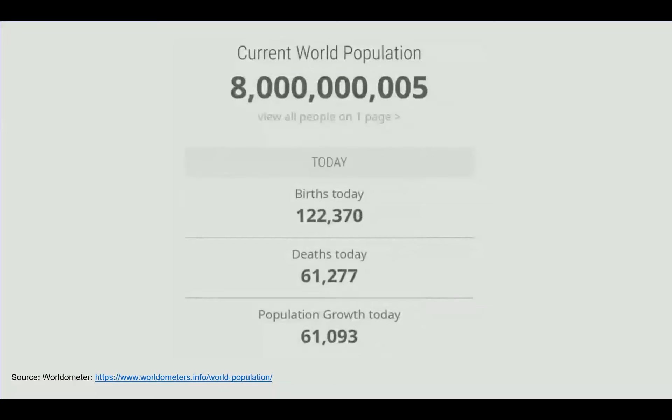Every day, 193,107 people are added to the world's urban populations. That's 1.4 million people per week, or basically the population of Sydney every month is added to the world's cities. How do we accommodate these people in a sustainable way?

And as I say, I think we have an ethical obligation to do so. The verb to build is an intrinsically socially good thing. 1.6 billion people around the world live in inadequate conditions. This is a photo I took from Mumbai, I think about 15 years ago, of the Dharavi area. So according to the United Nations, 1.6 billion people live in inadequate global conditions, inadequate housing, and 1 billion people live in slums. And I think the construction industry, the architecture industry, the built environment industry has an obligation to build, to provide healthy, safe and sustainable housing for everybody.

And building is a societal good. There's few things I can think of that provide a better societal good than to provide these kind of houses and hospitals and schools and more.

But at the same time, we have to accept as an industry that to build is often an intrinsic environmental bad. What I mean by that is every square meter we build has a carbon footprint, and that carbon footprint can be quite high. The materials we rely on in our industries have significant and often very negative impacts on the environment. So if we look at, on the left-hand side here, you've got a pie chart.

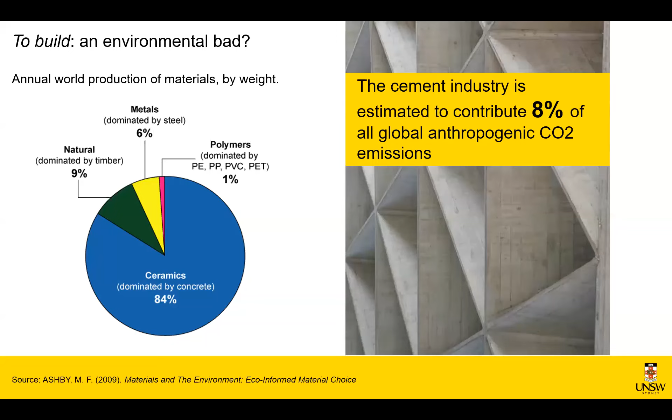This I find an amazing statistic - we are truly in the Anthropocene. As a human race, we have now dominated nature. If we weigh all of our buildings and infrastructure, they now weigh more than all trees and shrubs. That's an amazing statistic. All human-made stuff now weighs more than the biosphere, all natural-made stuff.

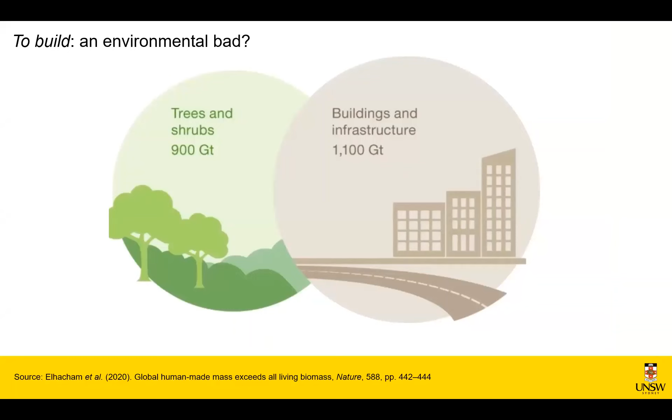That's quite incredible. There's another graphic I quite like which encapsulates this - a visualization of anthropogenic mass. What you're going to see on the right-hand side is all human-made stuff, and at the top it's concrete. Everything grey is concrete. On the left-hand side is all natural-made stuff, global biomass, the dry weight of all life on Earth. I'll put a little animation, hopefully this works.

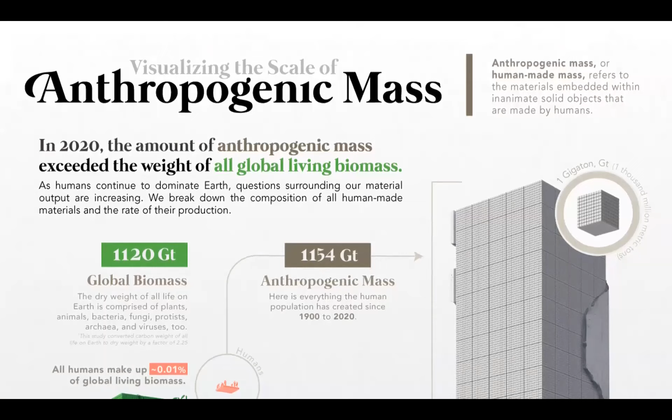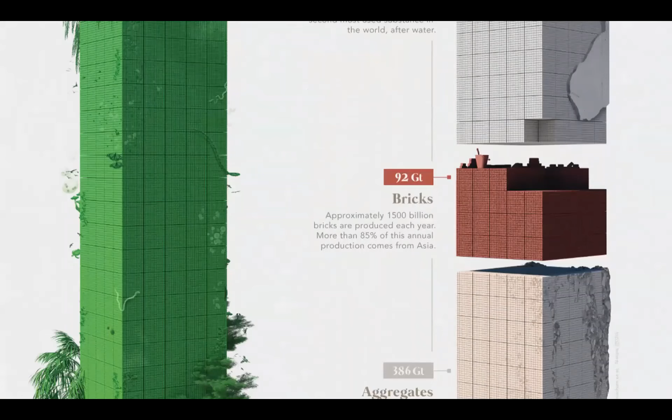So what you're seeing on the right-hand side, that's concrete. Each square of that is a gigaton. And then you've got bricks, and then aggregates, and then metals, and then asphalt - built environment materials. We use trillions and trillions of tons of these kinds of things, and they now dominate what the world is and what the world is made out of. All plastic, for example, now has double the total weight of the entire animal kingdom.

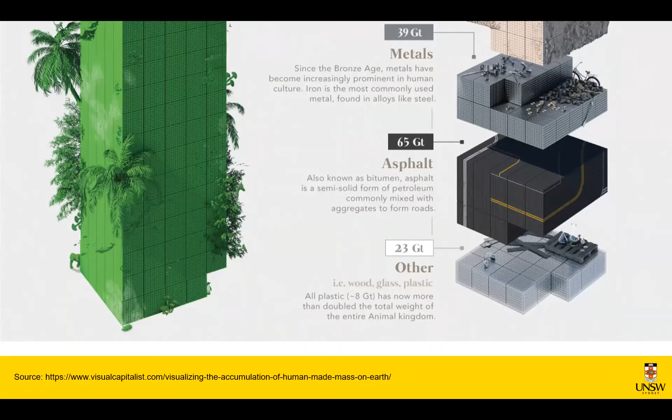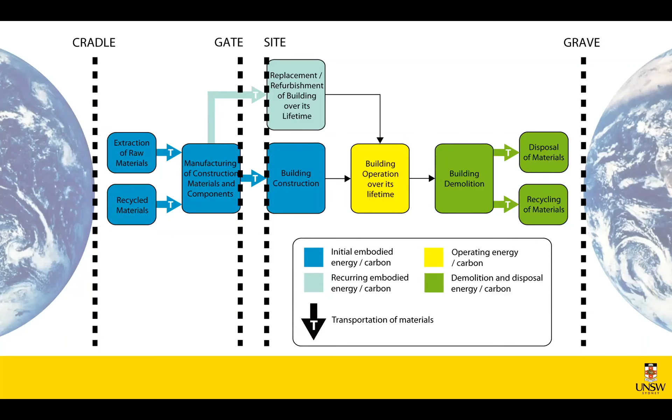At each point in this diagram, carbon emissions are released. As an industry, we're guilty historically of focusing in just on one part of that, just on the operational part. So what I really want to do today is open up that diagram and try to understand what some of the other areas are, how significant they are, and how we can reduce them. So what is embodied carbon?

Well, embodied carbon is the greenhouse gas emissions due to constructing the building and its materials - the greenhouse gas emissions from extracting the raw materials, processing those materials, assembling the components, transporting those materials around, effectively to make the building, and then to maintain the building, and also often to deconstruct and dispose of the building at the end of its life, although that's sometimes not included due to the uncertainty around measuring that in the future.

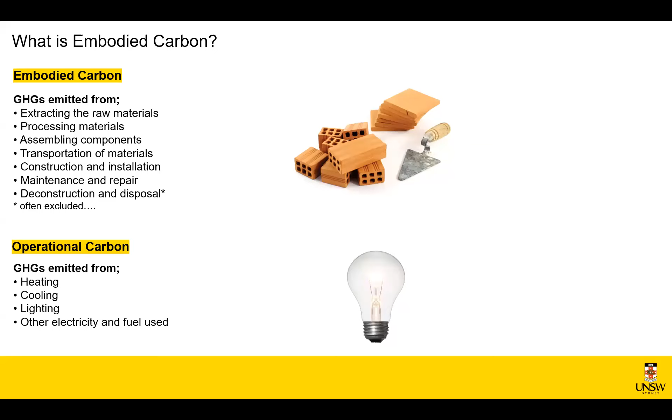And we've got the operational carbon - that's the heating, the cooling, the lighting, and the small loads, plugging in your iPhones and your laptops as well. And if we want to properly understand what impact a building has on the environment, we need to add the two of them together - the operational plus the embodied - and we get the life cycle carbon emissions.

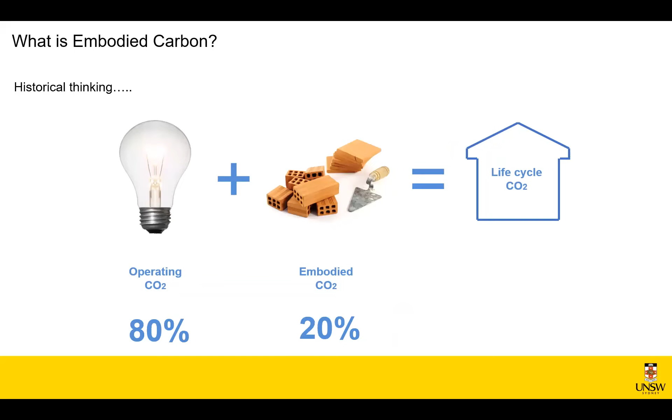It's relatively straightforward. And historically, you go back 20 years, when I was starting my PhD, the historical thinking was, look, our operating emissions are about 80%. Embodied carbon is important, but really it's about 20%. And you can see that in our building regulations, for example.

We have relatively mature building regulations around the world that are concerned with operating emissions. We have very few building regulations concerned with embodied emissions. However, our current thinking now is it's probably closer to 50-50. Now, why is that? Why has our thinking changed?

Well, our building regulations have got stricter, they've got tighter, we've got more energy efficient. To heat, cool and light that square meter of floor space, we use less energy now than we did, say, 20 years ago. Better facades, more efficient systems. To do that, often we use more materials. We might have more insulation in the building. We might have solar panels stuck to the building.

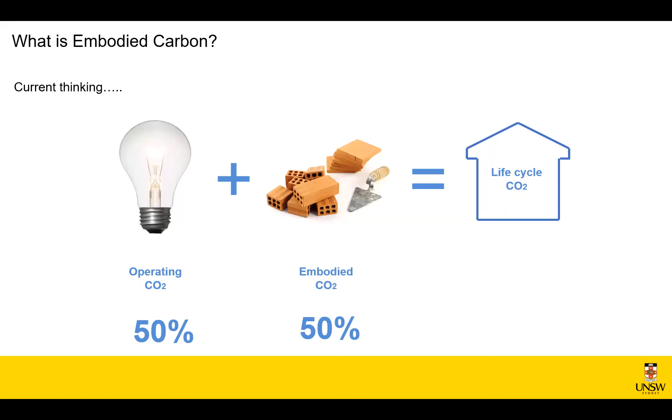We've also got better at measuring embodied carbon. We've got better at measuring some of the things that were not measured in the past, the mechanical systems, the facades, the finishes. So really, we're probably at 50-50. But the truly perhaps frightening thing, or thing to be very much aware of, is by 2030, we might be at 0% operating and 100% embodied.

So if we are to meet the World Green Building Council's targets, every new building built in 2030 onwards should be net zero or nearly zero operating emissions. So effectively it will have pretty much close to zero operating carbon. And what that will mean is our embodied carbon effectively becomes the total carbon footprint of a building. And that's a pretty big shift.

And if I look at an architecture student joining the program in my school next year, they will spend 3 years in their undergraduate. They might go out and work for a year, then they'll come back and do 2 more years in their masters, then they'll work a bit more. By the time they become an accredited architect, it will be 2030.

They'll be moving into an industry where the understanding of what our carbon emissions are will have totally transformed in 10 to 15 years. And they require a totally different way of understanding, measuring and changing the carbon footprint of our buildings. So this is all happening very, very quickly.

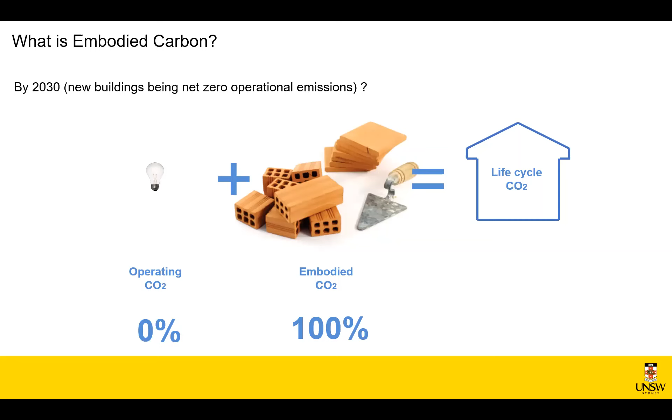Here's a good example, which I've calculated. If this year, 2020, we build a brand new NABERS 5.5-star office building in Sydney, we build it in 2022, and we're going to measure all its carbon emissions all the way to 2072. That's what you can see here.

And what we can see in 2022, we build the building, and that has a big upfront embodied carbon. You've got to make the concrete, the steel, the triple glazing, all the solar panels on there, whatever. I'm estimating that would be about 1,800 kilograms of CO2 per square meter. And then day one, the building opens, you turn the lights on, you turn the air conditioning on, and then you've got the red line.

And over time, the red line builds up and accumulates. That's the operating emissions. That's the heating, the cooling, and the lighting. But what you can see is that red line is not linear. That red line is curving. And the reason that red line is curving is because over time we're decarbonizing our grids as well, which is a good thing.

But it does mean that when we consider the whole life cycle footprint of a new building built in 2022, what we can see in the pie chart on the right-hand side is the embodied emissions make up the majority of the building's carbon footprint. In this case, about 2/3. Now, this is a low energy building and a high embodied carbon building. So sometimes it might be 50-50.

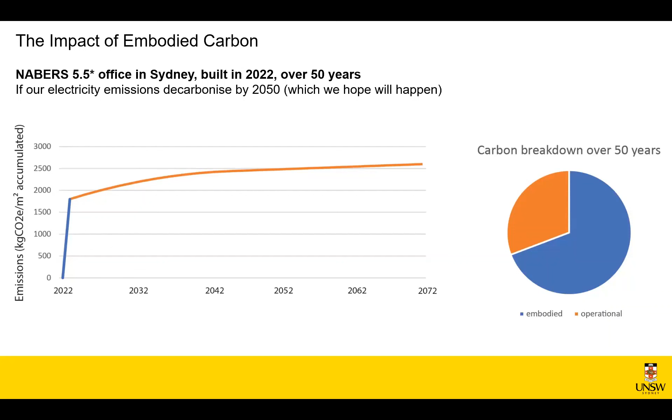So against this backdrop as well, as I mentioned before, we're building more than ever before globally. Current projections on future growth of buildings are effectively that we're building the equivalent of every building in Japan every year. So if you take the entire floor area of Japan, all the building stock, we're building that every year. 2022, we're building Japan. 2023, we're building Japan. 2024, we're building Japan.

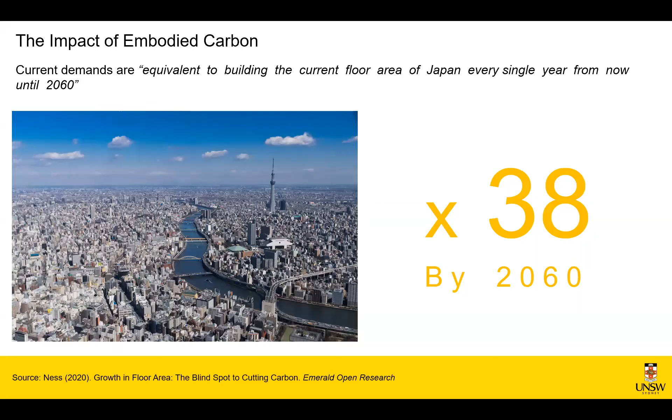So we are set to build all the buildings in Japan every year for the next 38 years. What's the carbon impact of that? How many thousands and millions of tons of CO2 emissions could that be? And how will that impact our aim to limit global heating to below 1.5 degrees? It's relatively easy to do the math around this.

If you want an 83% chance, it's 300 gigatons. You want a 17% chance, it's 900 gigatons. So it depends on what chance you want. Let's just say a 50% chance. So we've got a remaining carbon budget of 500 gigatons, and we're going to build 230 billion square meters of floor area globally. So let's assume we build all that floor area to the standard Australian detached house. And the standard Australian detached house, I know, is about 660 kilograms of embodied carbon, kilograms of CO2 per square meter.

So we've got a very simple piece of math. We can take 230 billion square meters, we multiply that by 660 kilograms of CO2 equivalent, and the embodied carbon of all those new buildings will be 151.8 gigatons of CO2. That's 30% of our remaining carbon budget.

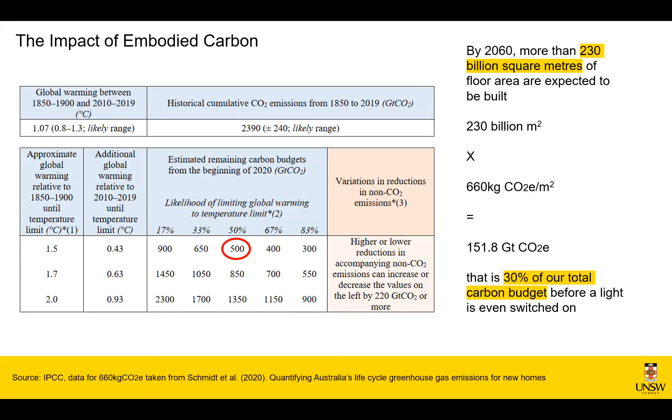And I think that's a contradiction. I think that breaks the laws of thermodynamics. How can you double what you've got while using basically zero or very close to zero emissions? And I think that says we've really got to fundamentally change how we build, how much we build, the way we build, and our thinking around building as well. That's what I really want to talk about in today's discussion.

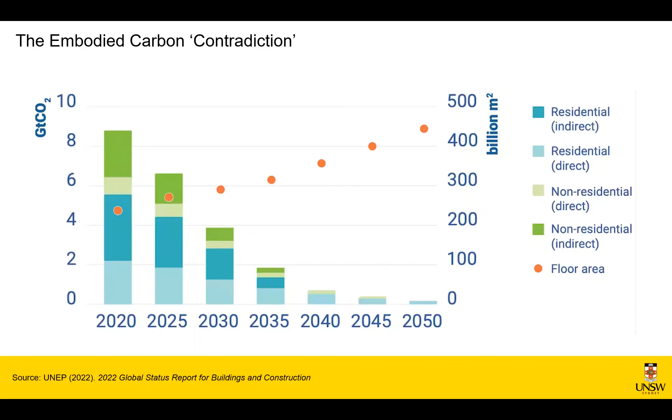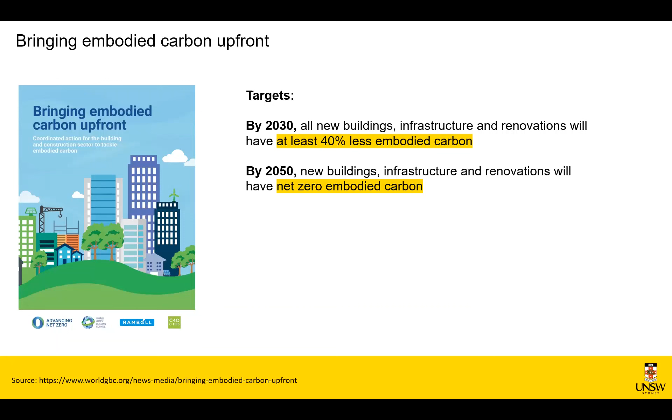By 2030, all new buildings, infrastructure and renovations will have at least 40% less embodied carbon. By 2050, new buildings, infrastructure and renovations will have net zero embodied carbon. So they're the two targets, 40% reduction in the next 7 years, and then down to net zero by 2050. How do we get there? Well, there are 4 main mechanisms that the report articulates.

Firstly, build nothing. Secondly, build less. Thirdly, build clever. Fourthly, build efficiently. And the key learning here is that build nothing or build less is better than building clever or building efficiently. The greatest savings of embodied carbon can usually be realized at the earliest stages of a project. So I want to spend the next 25 minutes going through the first of these: build nothing, build less, and build clever. I'm going to build on some other people's research and also show 2 projects I've been lucky enough to be involved in, particularly around the build clever side of things.

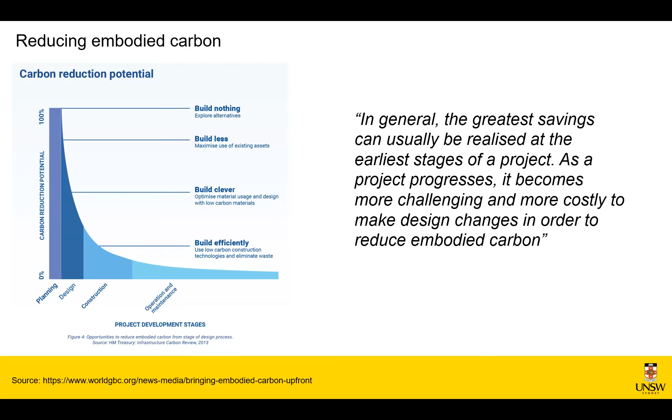It's pretty controversial because, as I started my presentation by saying earlier, we can't build nothing. We have a societal obligation to build, to improve people's lives. But it still means we are allowed to question when we build, and I think we do need to do that a little bit more. And this is a bit of a controversial, provocative kind of attempt by me, just to get everyone thinking. This is a bit of a thought experiment.

What would be the embodied carbon saving of not building 1 million homes? Well, 1 million homes, an average of 230 square meters, typical embodied carbon of 660 kilograms of CO2 per square meter, you would save 152 million tons of carbon dioxide. Now, again, I stress, I know 1 million homes are not necessarily left empty. But even if it was 100,000 homes we could better occupy, that'd be 15.2 million tons of carbon savings. So fundamentally, we do need to build, but we also need to question when we need to build and how we can make better use of our existing building stock as well.

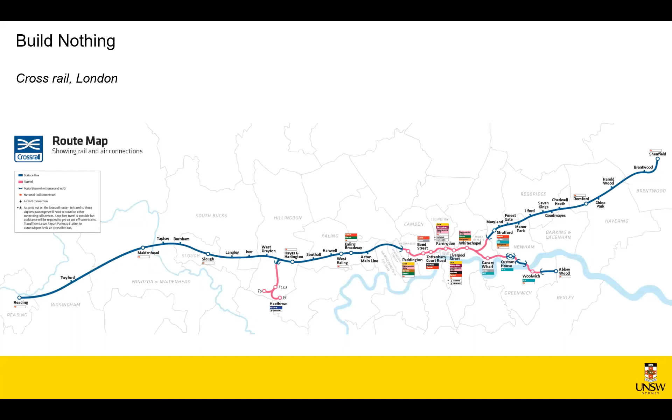Life cycle thinking also allows us to question when we should build too. And we've always got to recognize societal goods and environmental challenges. But this is a really good example. This is Crossrail in London. Crossrail is one of the most significant major infrastructure construction projects in the UK. I think it opened this year. Anyone who's ever lived in London, getting from east to west is a bit of a nightmare. The Central line is at capacity, so it's a new east to west connection across London. And it's a significant amount of construction, 10 years of construction, several new stations, a massive amount of infrastructure that will improve people's lives.

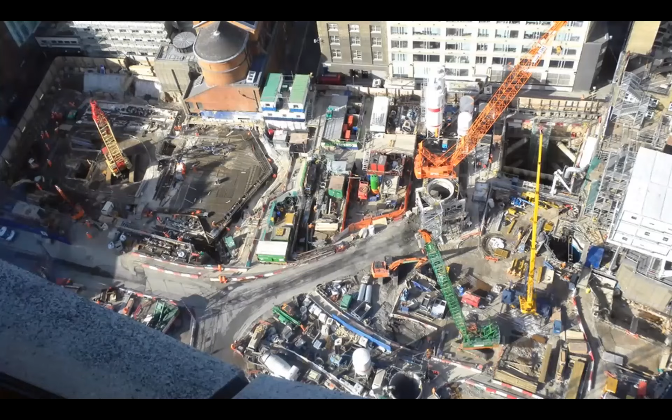So in the best case scenario, Crossrail would save 225,000 tons of CO2 per year. That's if lots of people get Crossrail and leave their cars at home, more people commuting via low carbon public transit. Now, if it is built in 2022, that best case scenario will take 8 years to get the carbon back, to effectively offset the initial embodied carbon. So Crossrail will be in carbon deficit until 2030. That seems pretty reasonable to me. You've got a pretty reasonable payback.

In the worst case scenario, it's only 70,000 tonnes of CO2 per year. And so your worst case scenario is about 24 years, and Crossrail would be in carbon deficit until 2046. That seems far less reasonable to me. So what we're left with is making a decision about whether we should build infrastructure like this, weighing the environmental benefits and disbenefits. We've always got to factor in the societal benefits as well. This is going to improve people's lives, productivity, health and well-being. There's less pollution from taking cars off the road.

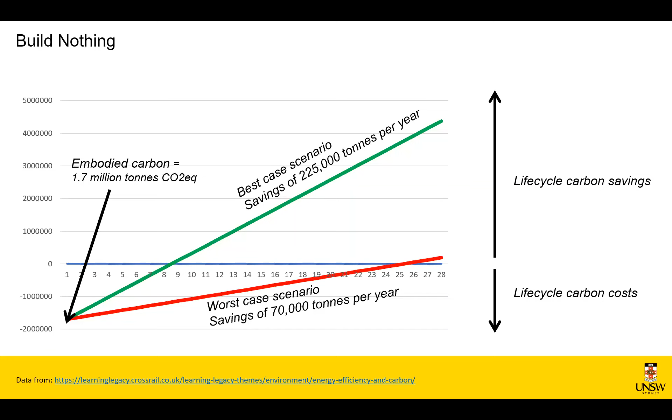So we've looked at build nothing, which is not really an option in many cases, but could be. Let's look at build less. And that will give you up to an 80% reduction of carbon emissions. And build less really talks about retrofit over demolish and rebuild.

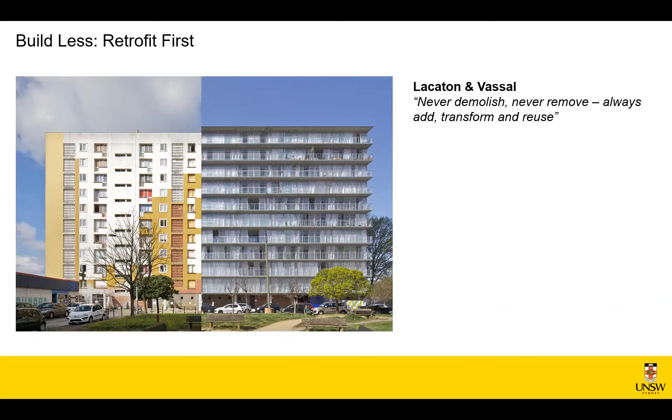And that's been, you know, celebrated by Pritzker Prize winning architect Lacaton & Vassal, whose kind of mantra is never demolish, add, transform and reuse, really promoting this idea that architecture needs to shift from building new buildings to firstly looking at retrofit and reuse. And we're starting to see this happen more in developments as well.

So the Olympics used to be slightly renowned for building all new buildings, which, you know, their legacy was sometimes quite questionable. And we're seeing in Paris 2024, Los Angeles 2028, there's a shift from building new buildings to retrofitting and updating existing buildings and building temporary buildings. So Los Angeles 2028, the master plan, its mantra is called radical reuse.

So Los Angeles can host the 2028 Olympic and Paralympic Games without building a single new permanent venue. We were fond of saying during the bid phase, and it remains true, the most sustainable venue is the one you don't have to build.

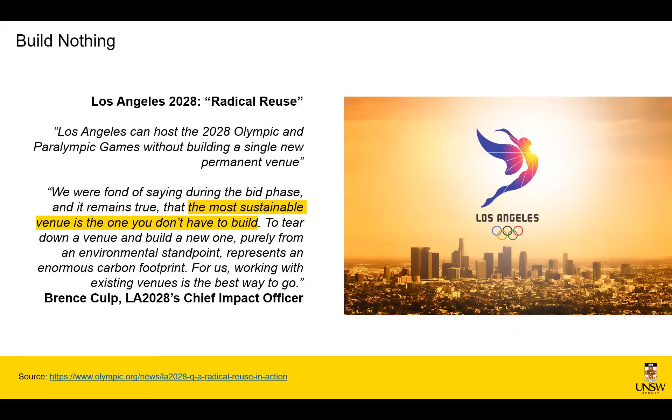Again, it's not always possible in every place around the world, but certainly where there is existing sports infrastructure, do we need to build new sports infrastructure? Or can we retrofit the one we already have? And I think there are some fantastic examples of this on our own doorstep.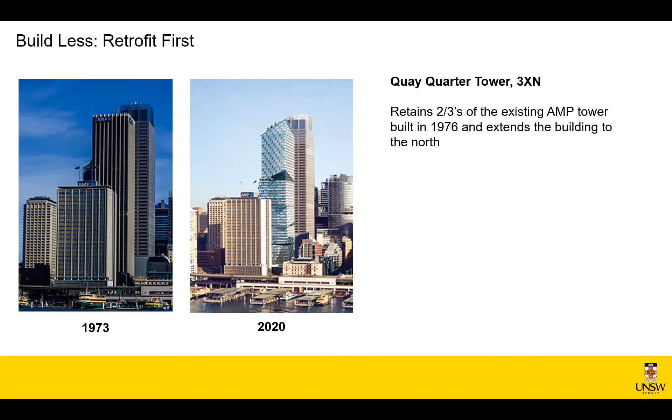I know I wax lyrical a little bit about the Quay Quarter Tower by 3XN and BVN, but I do think it is one of the most important tall buildings of the 21st century. The radical upcycling of a 1970s office block to almost double the floor area, but to save around 7,500 tons of CO2 as well. And it's quite the construction feat as well. So all credit to the architects, the developer, the contractor and everyone. It's quite an amazing project.

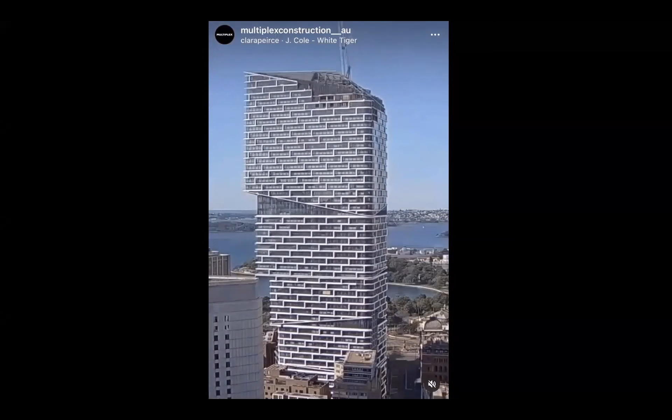And I did the numbers around this as well. There are 1,000 tall office buildings around the world that are over 50 years old. And therefore I think 1,000 buildings at risk of being demolished. What better way to save carbon emissions than to upcycle them into a more contemporary, more efficient and more spectacular piece of architecture on the skyline as well.

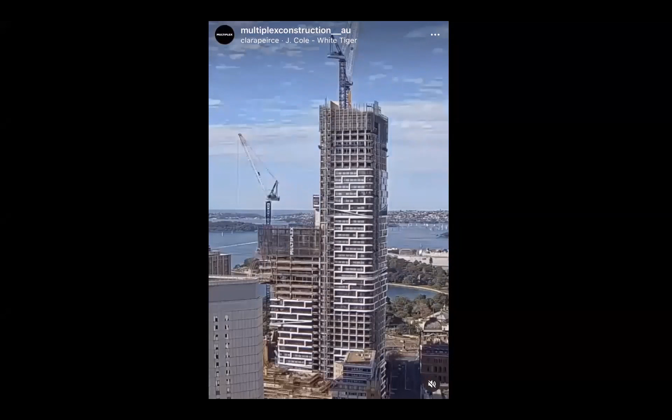We also need to build towards a circular economy. Our current industry is incredibly linear. We take materials, we build, we demolish, take new materials, we build again. And so moving towards a circular economy in our industry is vital. This is one of my favorite examples of it. It's called Resource Rows in Copenhagen.

We all love recycled brick, but it's incredibly energy intensive and cost intensive to cut the bricks back out of the mortar. So with Resource Rows, there were some existing industrial buildings on site. They got a circular saw, cut patches of these buildings out and basically hung them as rain screen cladding. You can like the architecture or not, but it's an incredible reuse of existing materials. I think we should start looking at our existing building stock as a resource for new materials. Buildings as material banks, potentially.

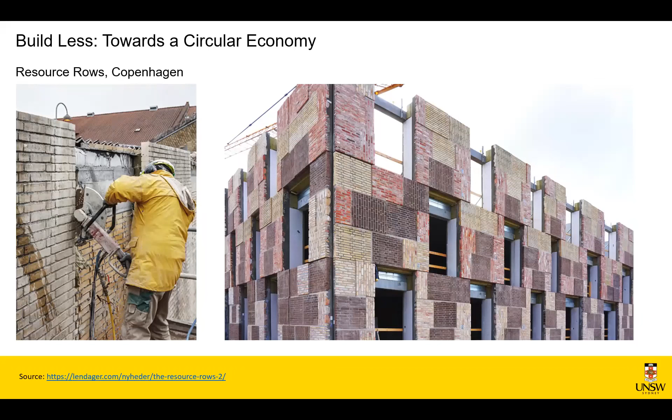In Holland, they're quite far ahead in this regard. They're probably at the cutting edge of the circular economy, and they've mapped where all materials come from into the built environment and where they all go, which is an incredible feat of research. And this is a fantastic Sankey diagram that tells the story. What they found in their circularity report is that 88% of demolition waste was recycled. That's great, but most of it was downcycled. Concrete was crushed up and made into aggregates to put under roads. Most of it went into infrastructure.

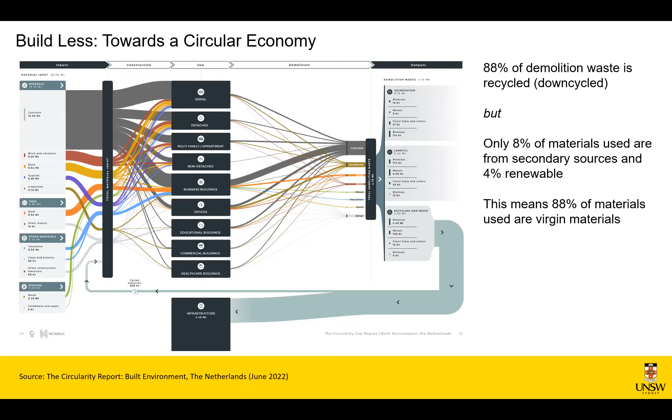When they looked at the materials going into construction, they found only 8% were recycled materials and only 4% were renewable materials, basically biomaterials, natural materials. That meant 88% of materials going into the system were virgin materials. So while a lot of material was being recycled, it was being downcycled. What the circular economy commands us to do is to upcycle materials, to make sure they're as useful as the original materials, so they can live a number of useful lives.

Call me slightly utopian, but I see a future, and I'm convinced there has to be a future where we consider buildings not as the final resting place of our materials. We should consider buildings as a temporary, long-term resting place of our materials.

If you put a piece of cladding on a building now, the building owns the cladding, and it's designed to stay there for all its life. What if it didn't? What if the building rented or borrowed the cladding for 20 or 40 years? Then at the end of its life, it was given back to the original manufacturer, reused, recycled, and turned into something else.

Now, I realize that might be slightly naive and will require changes to industry, society, and economics. It will require companies that still last 40 years. But really, those socio-structural moves are what we need if we are going to actively see a circular economy in our built environment.

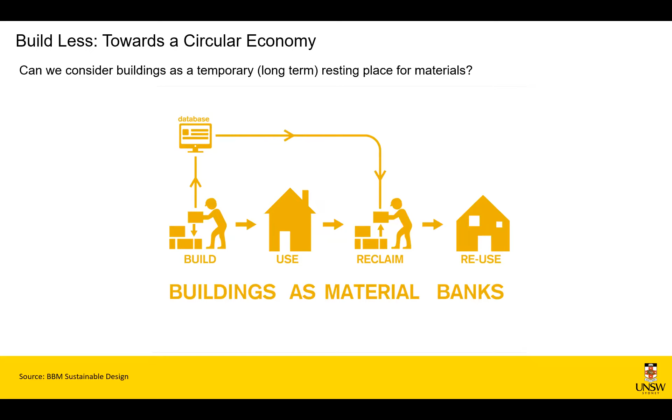Checking time. The third thing I want to talk about is building clever. Here you've got up to a 50% reduction of embodied carbon. I see our buildings today like a cast—you break your wrist, wrap a cast around it, and it's very effective and functional for keeping the wrist still, though sometimes it gets a bit itchy.

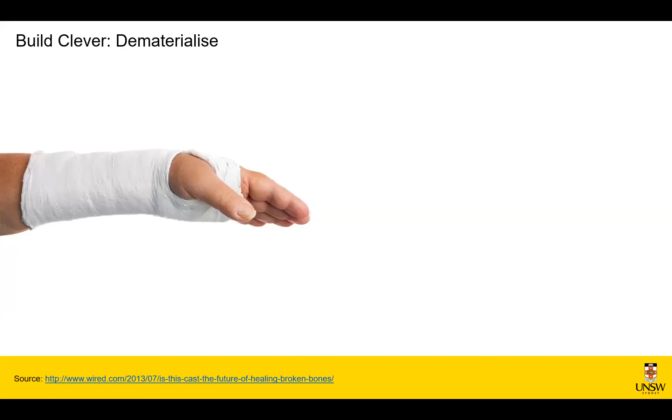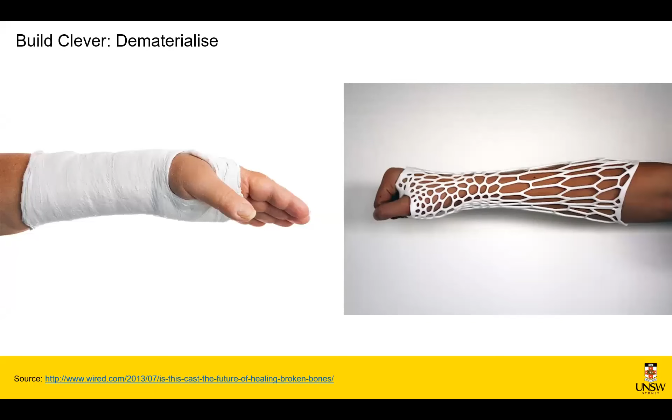I was lucky enough last year to get a tour of William Smart's office—I'm sure many of you have seen it. It's an adaptive reuse of a 19th century industrial space. What amazed me is how delicate and thin the steelwork was. The reason was that when it was built, materials were incredibly expensive and valuable, but labor was cheap, so you spent a lot of time really minimizing the material that went into a building, dematerializing it to make it efficient and economic.

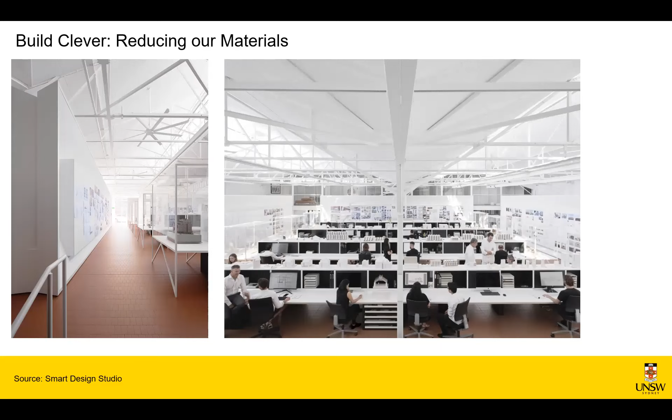Today, the opposite is true. Materials like concrete are pretty cheap—we can just put a big 200 millimeter thick concrete slab to create a floor slab, while labor is very expensive. So we really have to minimize labor to make things economic rather than minimize materials, because materials are cheaper effectively, although that's perhaps starting to change.

I'm really fascinated to see innovative new material and product developments like this—a minimass hybrid beam. It questions why we've got a 500 millimeter deep concrete beam; we don't need all that material, some of it is redundant. If we cut out all the material we don't need, we can save 78% material weight. I think that kind of innovation, although more labor and thought intensive upfront, as it becomes more commonplace could really dramatically dematerialize a lot of our built environment.

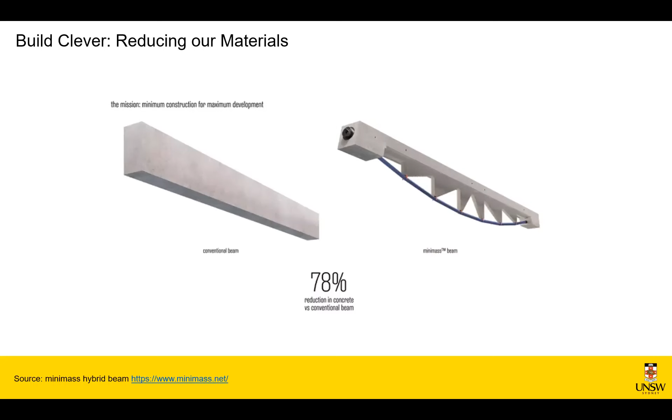I want to give an example of just how significant dematerialization can be. This is the Shanghai Tower by Gensler, built several years ago in Shanghai—a 632 meter tall building. If anyone wants to talk to me about whether a 632 meter tall building is sustainable or not, you can catch me later; I won't go into it now.

When you build that tall, there are huge lateral wind loads pushing on the building. So they went for a structural optimization program to reduce the wind pressure. In the end, they found a 120-degree twist of the building reduced the wind loads the most, by 24%. That also reduced structural materials by 32%, cutting the amount of materials by 20,000 tons of steel.

That had a triple benefit as well: reduced wind loads, reduced materials, and also saved 58 million US dollars from the construction cost. Benefit all round.

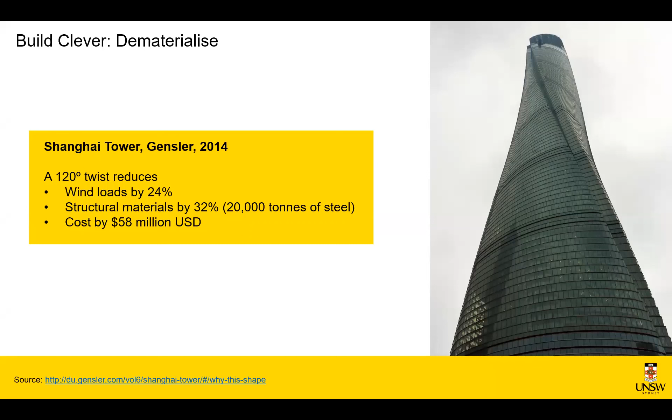It's worth pausing for a moment to think, what is 20,000 tons of steel? What kind of saving is that? If you do the analysis like I did, you'll see that 20,000 tons of steel is about 42,000 tons of carbon dioxide. Now, the top of that building has some wind turbines that rotate and generate low carbon energy. Those wind turbines would have to turn for 358 years to offset the same amount of carbon emissions as was offset by dematerializing the structure. The reason I show this is to show the very significant impact of embodied carbon savings, as opposed to sticking some green bling technologies onto the top of the building.

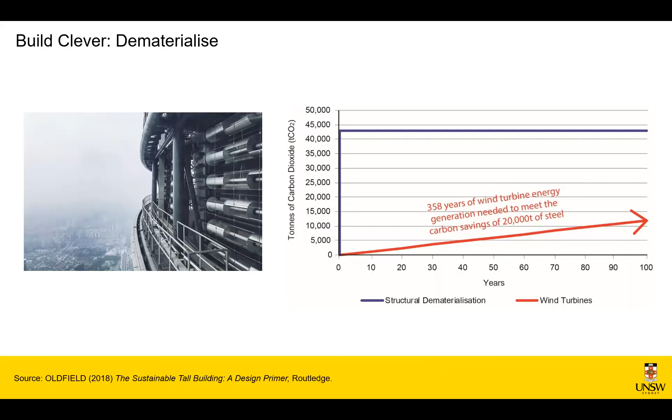It also means we've got to very carefully question what we do in a building. Again, I'm going to come back to that societal good, environmental bad analogy. This is the Intesa Sanpaolo Tower in Turin, by celebrated architect Renzo Piano. It does what a lot of tall buildings in Sydney and around the world do: it tries to open up the ground floor for a public plaza.

To do that, it transfers all the structure out using that big red transfer truss, a pretty significant piece of engineering. That transfer truss is 2,350 tons, with an embodied carbon of 6,815 tons. My question here, and I don't know the answer, is: is it worth it? Is that environmental cost of nearly 7,000 tons of carbon dioxide worth opening up that public space at the bottom? Perhaps it is, perhaps it's not, but we need to be having the discussions and doing the calculations, and having the qualitative and quantitative analysis, to really understand if decisions like this are the right ones for society and the environment.

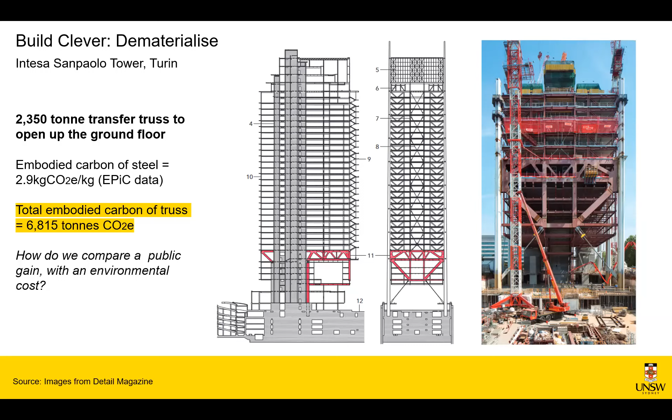Now, I bet you didn't think you'd get a lecture on healthy eating in this presentation, but here you go. This is the food pyramid. Basically what it says is to have a healthy diet, you need to eat more of the foods at the bottom of the pyramid and fewer at the top. More vegetables, salads and fruit, more wholemeal cereals and breads and potato, and less sugary drinks, fat and salt. So to have a balanced diet, more from the bottom, less from the top.

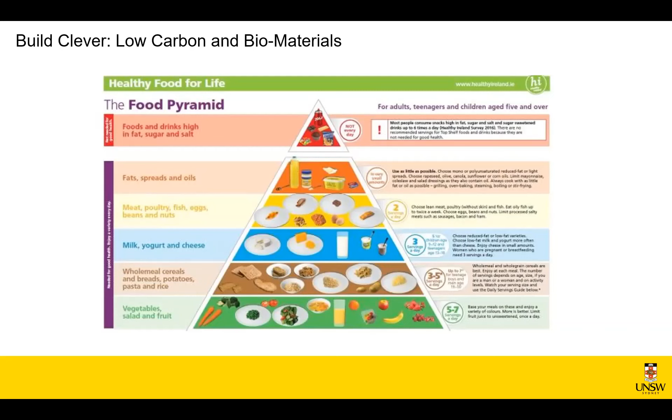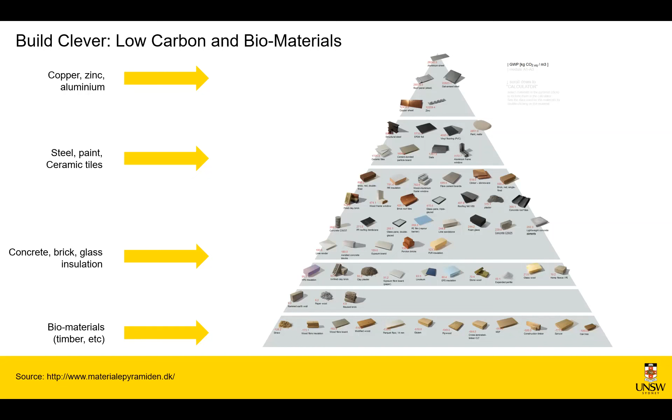Biomaterials are very interesting. I think there's a huge opportunity for us to start to transform our built environment using biomaterials. You can see timber - this is International House by Tzannes on the left - and you can see even cork and some quite innovative materials. You've seen cork, and there's cob, there's all sorts of interesting materials as well. The thing about biomaterials is, effectively, you either dig materials out of the ground or you grow them. That's where materials come from.

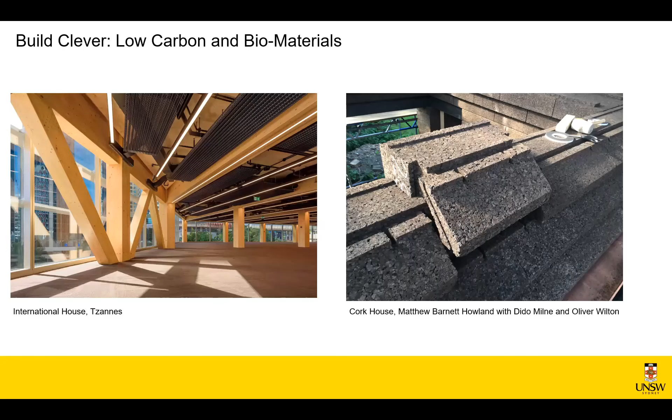There's no other option. If you think about concrete, concrete intrinsically emits carbon emissions. When you make concrete, you heat up limestone in a kiln and it releases CO2. Biomaterials do the opposite - when you grow a tree, it absorbs CO2. And you can take some of that benefit and allocate it to a building.

So the first project I want to talk about - I'm going to speed up a little because I've only got about 10 minutes left - is called the Carbon Value Engineering Project. This was a project funded by the CRC for Low Carbon Living, a collaboration between UNSW and Multiplex. Effectively, this project set out to look at the cost of buildings and their embodied carbon, and how we could bring the cost down and the embodied carbon down simultaneously. One of the things we did is we took a Multiplex building and modeled it to determine its embodied carbon.

Then we looked at lots of different options to reduce the cost and to reduce the embodied carbon as well. So you can see the building on the left-hand side. It had 5 stories of basement, concrete basement, and then 13 stories above ground. And it had an embodied carbon, we found, of about 750 kilograms of CO2 per square meter.

Now, if we change that building to a post-tension slab, we saved 8% of embodied carbon. If we changed it to a CLT and concrete hybrid, we saved about 16%. But if we move to an entirely timber structure with a concrete core, we save between 18 to 32% of the embodied carbon emissions. And you never know by looking at the building from the outside. The building stayed exactly the same GFA, same NLA, same cladding, just changing the structure saved up to 32% of embodied carbon emissions.

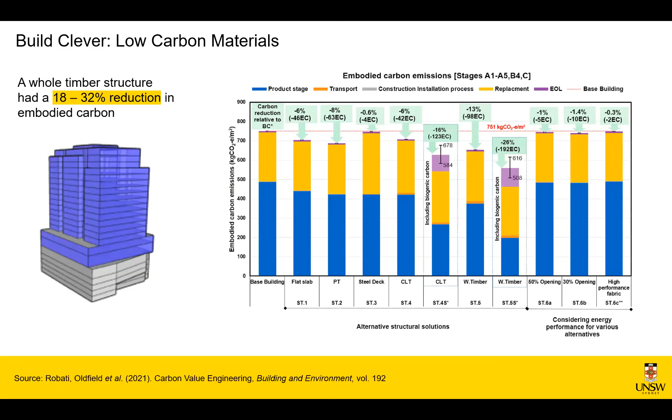So I'm going to end with one more project because I've got about 5 minutes left. I'm asking the question here: can we get down to net zero in Australia? And that's net zero embodied and operational.

This was a project funded by the Digital Futures Institute. It was led by Cameron Allen and Tommy Wiedmann, with collaborators from UNSW, Monash, UTS, CSIRO, etc. We had 3 or 4 aims.

Firstly, we wanted to model the Australian built environment sector between 1990 and 2050. That's all commercial buildings, all residential buildings. We modeled them all, and we included operational and embodied emissions.

The model we used was what's called a top-down model. So we didn't model the number of buildings, we modeled society and how that impacts the number of buildings. I'll talk a little bit about that in a minute. And we wanted to look at what is the feasibility, the scale of pace, and the policy settings that can deliver net zero whole life cycle built environment by 2050.

So the model was developed by Cameron Allen. It's called the i-SDG Australia Framework Model. It's basically a stock and flow model, and we added a new built environment module to that.

What the built environment module does is, in a typical stock model, you say there's 10 million homes in Australia, and we reckon there's going to be 15 million in 10 years' time, or whatever. So you model a number of houses. We didn't do that. We modeled the economy. So what we did is we modeled things like GDP, personal wealth, and other factors which we know impact the number of houses and how big houses are.

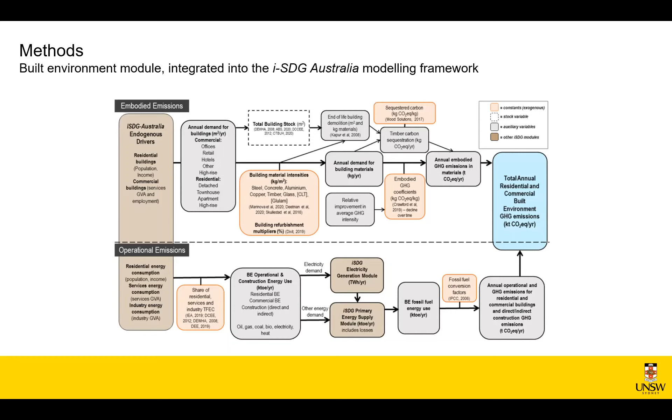Commercial buildings - we didn't say there's going to be 10 million square meters of extra commercial buildings per year. We said the size of commercial buildings, or the construction rate of commercial buildings, will be driven by the service sector growing, by GDP and other factors. So it's really looking at socioeconomic factors and how that impacts the amount of growth in the built environment sector.

We modeled 3 scenarios. The first one was business as usual. So we just said higher population growth, temperature increases, resource demands. We modeled a slow transition to electric vehicles. We said 80% electric vehicles by 2050. We said 30 to 50% of buildings will be all electric by 2050, and 60% renewable energy by 2050. So assuming we carry on the pace we're going.

Then we modeled two ambitious scenarios. Scenario one looked at lower resource demands, a quicker change to EVs. It looked at a greater financial investment in energy efficiency. So we assumed 70 to 80% all electric buildings by 2050, and 80% renewable energy by 2050.

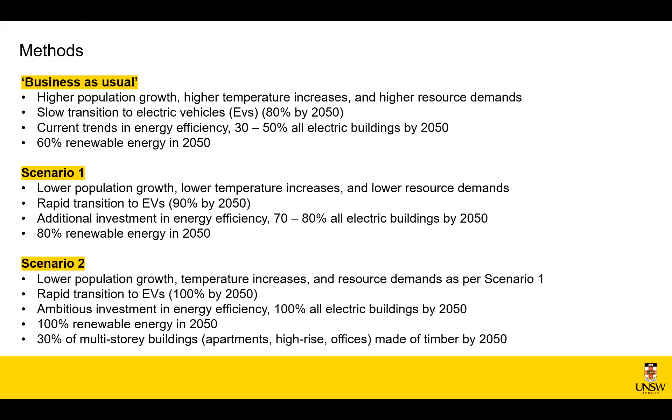Finally, scenario two was the hardcore ambitious scenario. So it was 100% electric vehicles by 2050, 100% electric buildings by 2050, 100% renewable energy by 2050. And the additional one we did is we added 30% of multi-story buildings were going to be built out of timber slowly over time - 1% in 2021, 2% in 2023, 3% in 2024. So we built up the capacity of timber buildings in society.

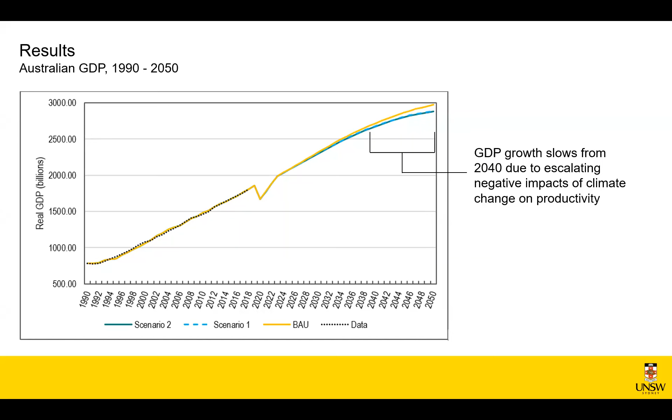So the results are quite interesting because, as I say, the model is driven by socioeconomic drivers. What we can see here is GDP in Australia, and you can see GDP is increasing. Then there's a dip - that dip is COVID-19. You can also see the GDP starts to curve off because the model acknowledges that GDP will slow due to climate change impacts on productivity around 2040. So we're factoring in those broader impacts as well.

Embodied carbon, business as usual, reduced down to 4.3 megatons, because what we're measuring here as well is we're decarbonising supply chains. We're using far more renewable energy. So the embodied carbon of concrete, the embodied carbon of steel is dropping. Scenario one got us down to 1.6.

Now, interestingly, scenario two became negative. We got a negative embodied carbon, and the reason for that was the timber buildings. What we were modelling is all the other materials were reducing in embodied carbon, but for timber, we were factoring in the long-term sequestered carbon storage over time. Timber elements, trees, obviously photosynthesize and absorb CO2, and we're considering that within the long-term carbon storage of those buildings. So that gives us a negative number.

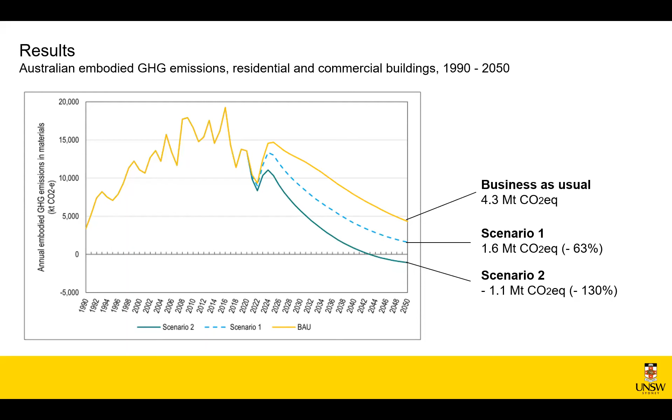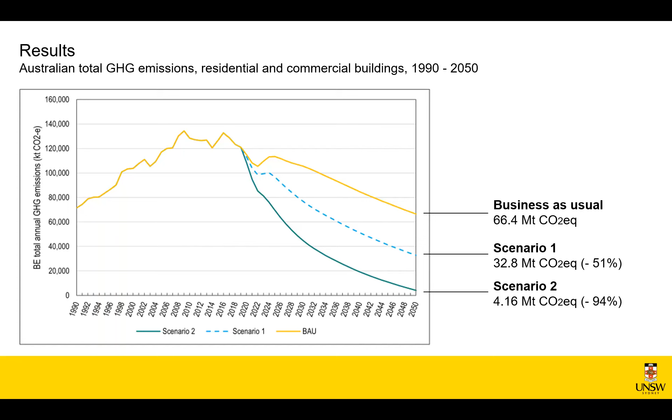Overall, this is embodied and operational emissions. Business as usual was 66.4 megatons, and we got down to basically very close to zero with scenario two. What we found is we could actually get down to negative total emissions with some tweaks to the system and the number of timber buildings we were building, and some other factors as well.

There were some limitations to this study. Firstly, we only considered six materials: timber, steel, aluminium, copper, concrete - I can't remember what the sixth one was. So we're not including necessarily all carpets, all the finishes, all the paint, and so the embodied carbon was a bit of an underestimation.

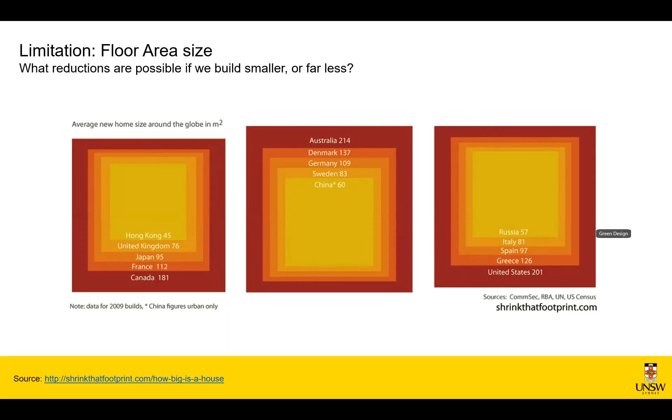But the other thing we didn't consider is reducing the floor area of housing, and I think that's a big consideration. That's because a model assumes as people get wealthier, we buy and build bigger houses - that's an intrinsic kind of relationship. One thing that could have got that reduction down sooner, or could have offset all those additional materials we didn't model, is if we start to build more compact, sustainable floor spaces as well.

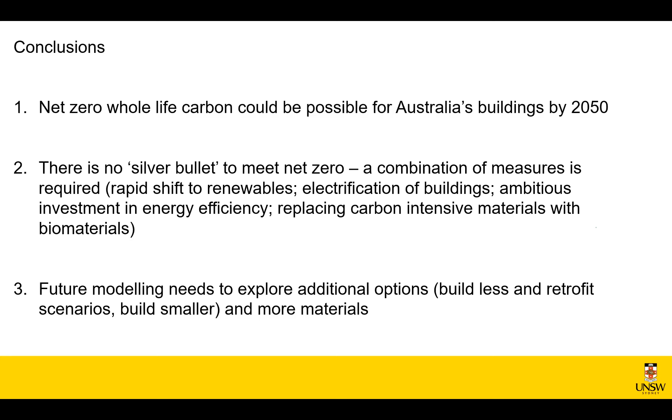So, in conclusion, what we found is net zero whole life cycle carbon could be possible for Australia's buildings. But what's key is there's no silver bullet. We need a combination of methods, a combination of systems, a combination of approaches: a rapid shift to renewables, electrification of buildings, ambitious investment in energy efficiency, and the use of biomaterials as well. Future modelling and research in this area needs to include not only more materials, but also build smaller, build more efficient, and build and retrofit first scenarios as well.

And I think I am just about in time. Thank you ever so much.